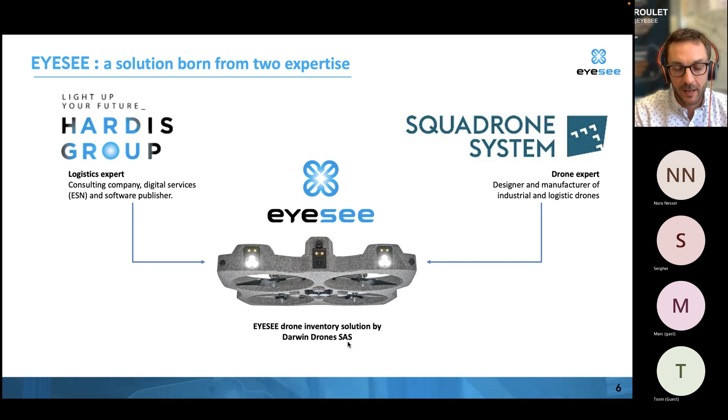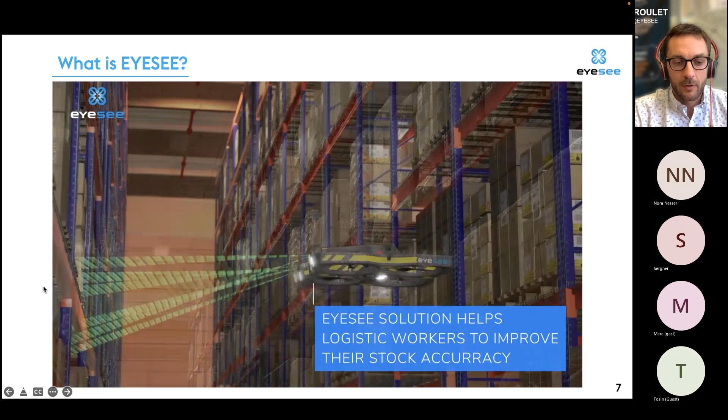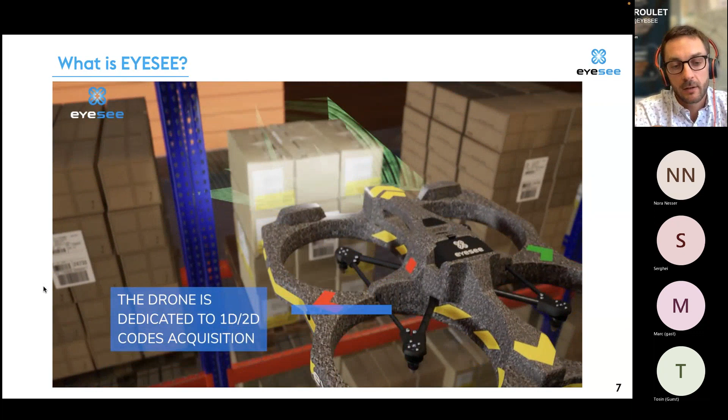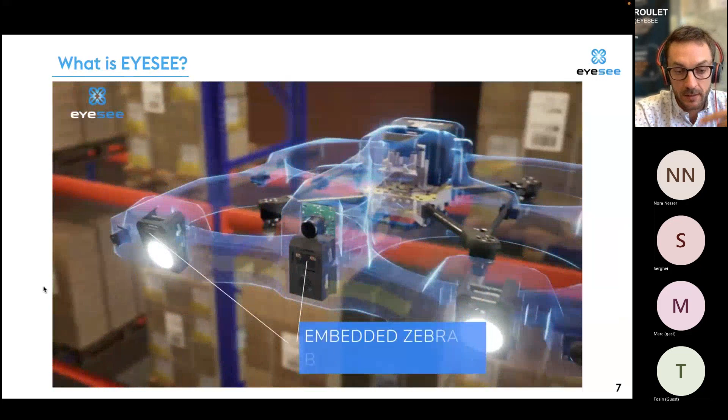So what's EYESEE? Just a very quick video - maybe you have seen that on our different media. EYESEE is really something that helps logistic workers improve their stock accuracy. It scans 1D and 2D codes, everything on full width, even in motion, and it detects empty locations automatically thanks to sensors dedicated to that at the front of the drone. So we have 3 Zebra barcode readers, because it reads very well - this is really efficient.

We have an HD camera and also ultrasonic sensors. Every data from every sensor is sent to our autopilot. This is our own autopilot.

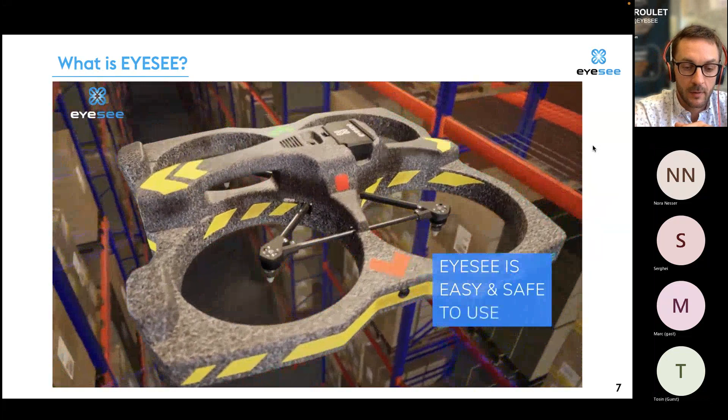We master the hardware and the software, along with our partners, and that's why it flies autonomously. There are a lot of sensors, a lot of technology on this. This is not the subject today, but if you have any questions, feel free to ask.

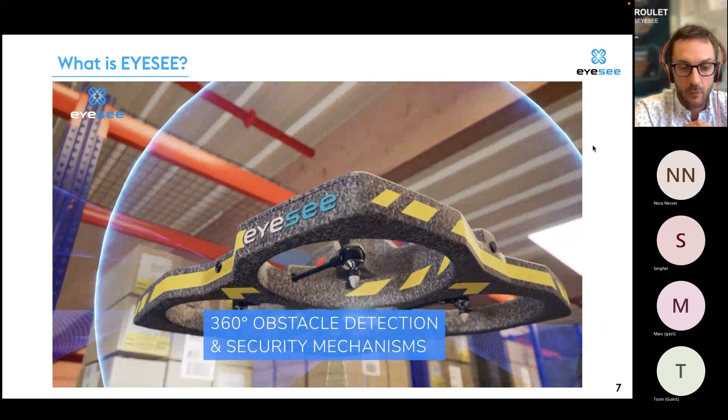This is easy to use, and this is compatible with all WMS and ERP with import and export features, from EYESEE Cloud, and we are working on an API in order to simplify this.

Of course, it detects obstacles, and this is really safe. If there is any wrong behavior of the drone or anything that is not well before starting a mission, the drone won't allow takeoff.

So this is something very robust, and we have worked and are working very hard to help you use it as easily as possible.

We take pictures of each location. We can take one or several.

Everything is customizable, even the code you want to scan. You can look only for one code of 9 digits starting with 52 - we will scan only this - or you can be more open.

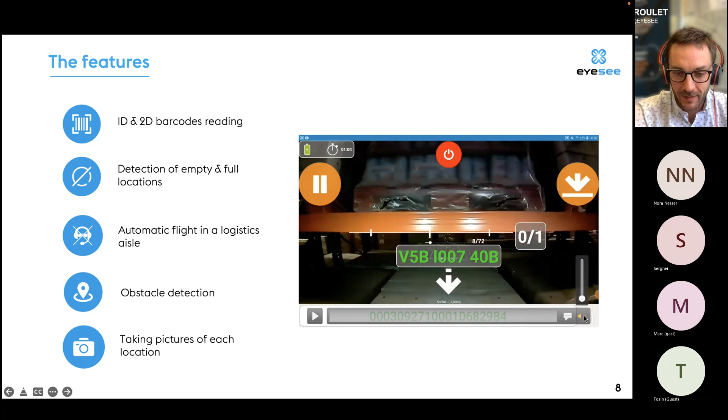As you can see, you see live what the drone sees, and it scans in motion.

How does it work? This is not 3D anymore, this is a real video, with Regis from our team. Hello, Regis. So how does it work?

Everything is in the box, in the case. You have the drone, all accessories, etc. It's really easy to transport.

You have 2 EYESEE tags, and I will pause on this because it is important. We have 2 EYESEE tags mandatory to use the drone. You have to put one tag at the beginning of the aisle and one other at the end of the aisle.

And there is also a Wi-Fi router here, and so we are not connected to your Wi-Fi - we are just using our local network. This router will be connected to the Android tablet, to the Android app, and to the drone. This is really a closed network.

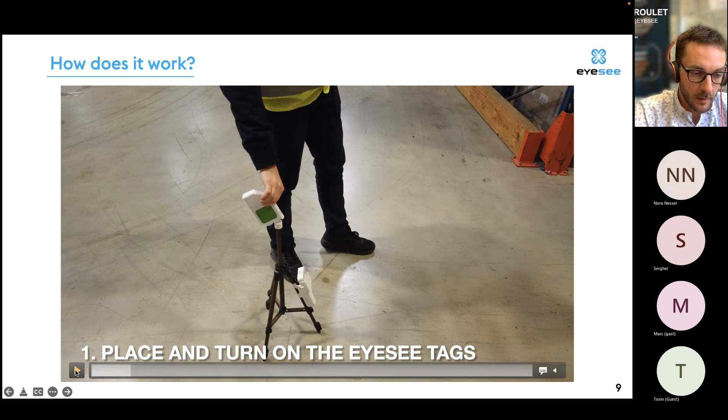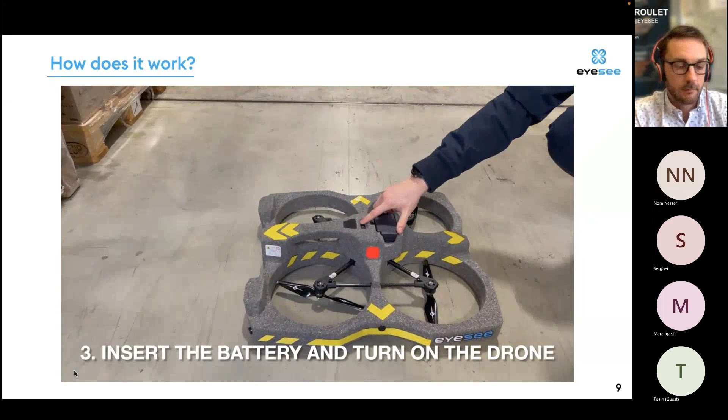Then you put the second one, you install the drone in front of the first location of the mission. So it can be, most of the time, at the beginning on the ground at left.

And then you insert the battery, power on the drone, and select a mission relative to where you are located. You can visualize the mission before doing it.

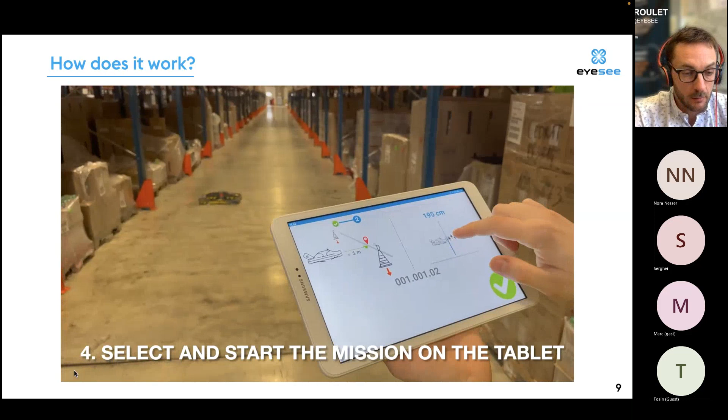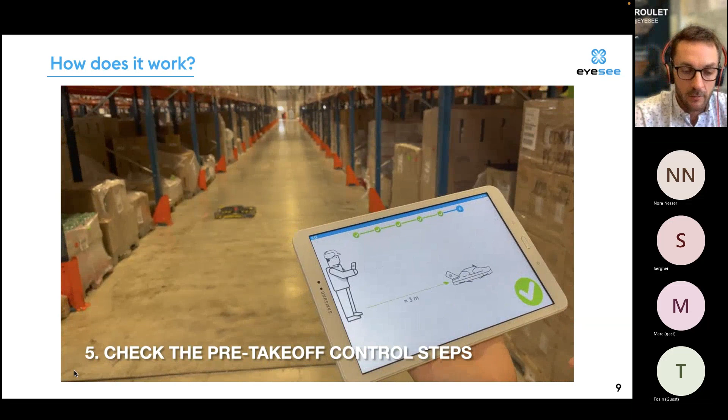You can, for example, cancel level 0 because everything is in picking, so you don't want to check that, or you can cancel the last level. You can do a lot of things in the warehouse, and of course you have prepared that, or your manager has prepared that, on EYESEE Cloud previously.

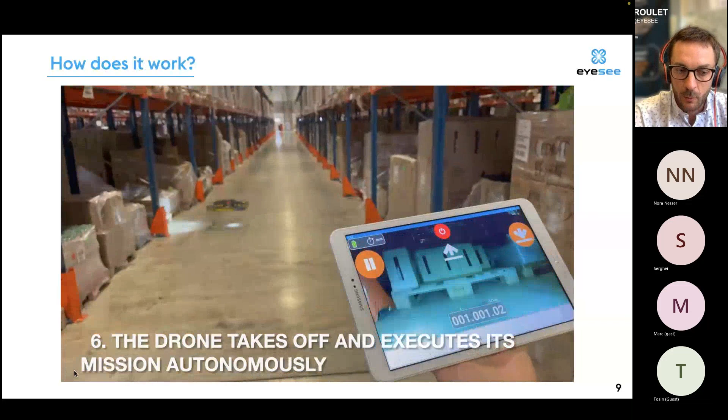Here you can see you just have to press a button in order to launch a mission, and that's it - the drone will take off and start its mission.

You can fly for 2 hours with the included set of batteries we supply with the drone, and this avoids you having to use any scissor lift in order to do your inventory check.

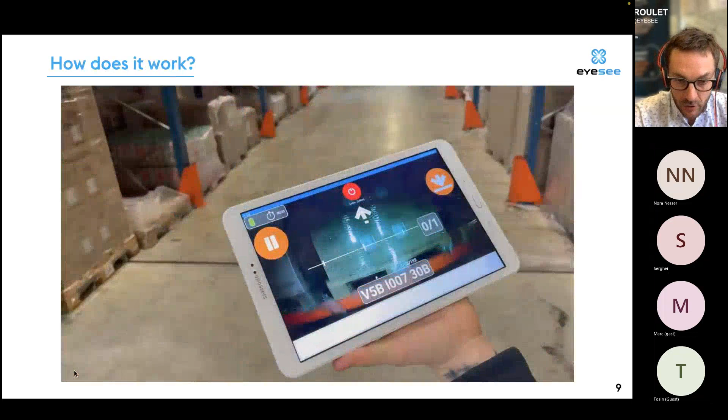As you can see here, we don't scan all codes - we scan only the code we are looking for. You can see where you are on the tablet.

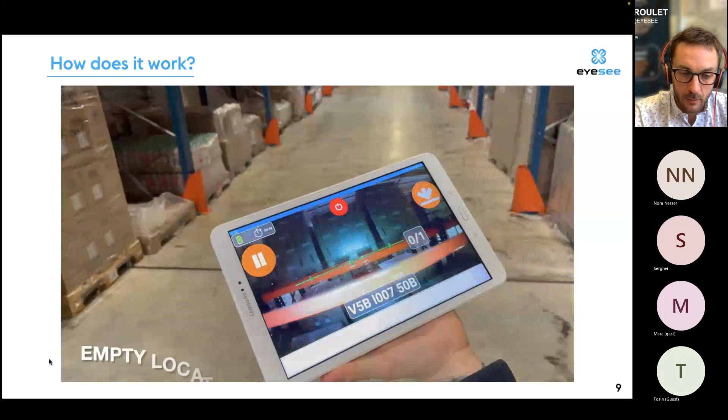Here you can see that we are going to detect an empty location. The drone - it's really easy how it works - it detects automatically if there is something in front of it.

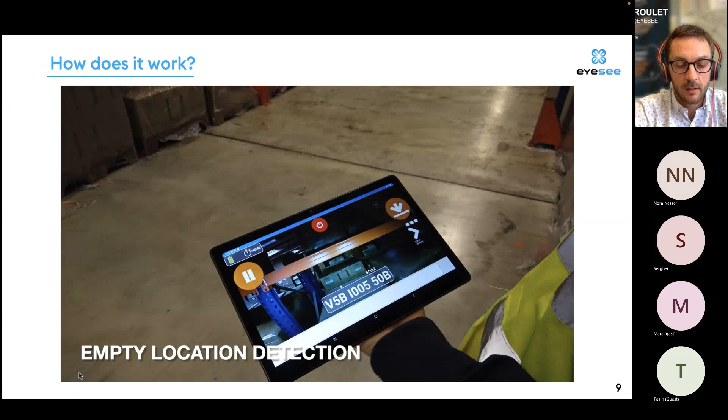So if the location is empty, the drone won't look for any code. But if the drone does detect something, it's going to look for the code you are looking for, or the category of code you are looking for.

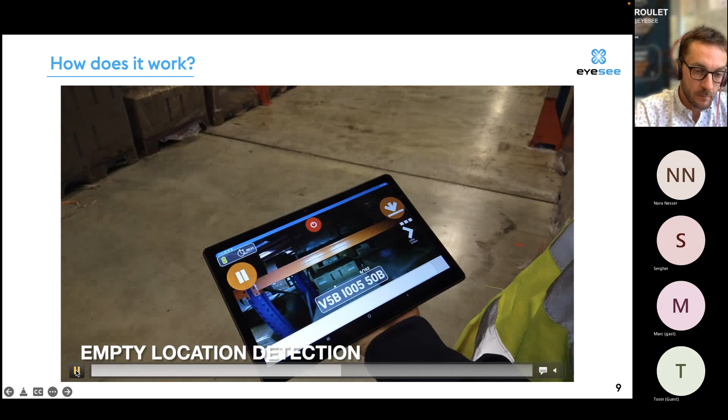There are also additional features. For example, if I pause, the drone will stop, and you have a little menu. You can declare a specific point of interest, such as identifying a problem on your rack, or another problem of category 1, category 2, or anything. At the end of the mission, you will have a resume of at which location what has been declared, so you have a view of the stock and a view of the points of interest.

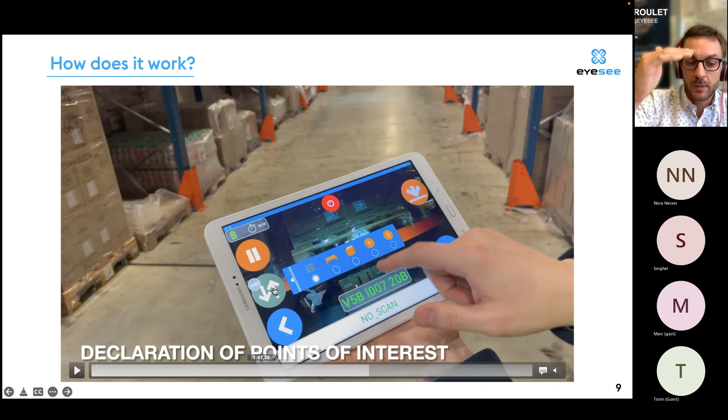Here, as you can check, is another button. This is a redo button. So when we cannot scan something at the location, or there is a missing code, you can just touch this button and the drone will repeat its movement. It can also be done in auto mode, so you don't have to push the button. If there is a no-scan, the drone will start another time, and it will reduce the speed in order to have the best chance to scan.

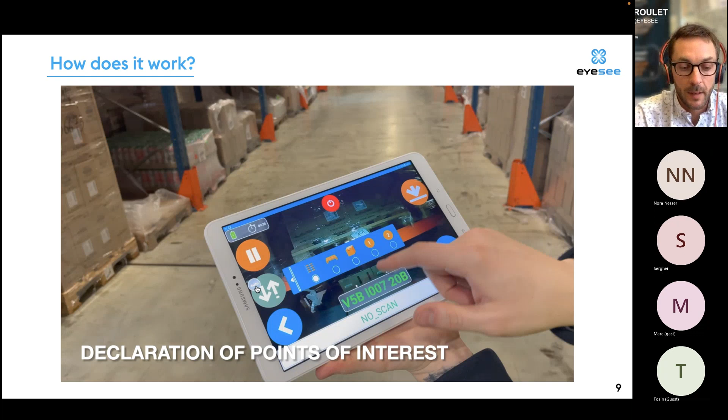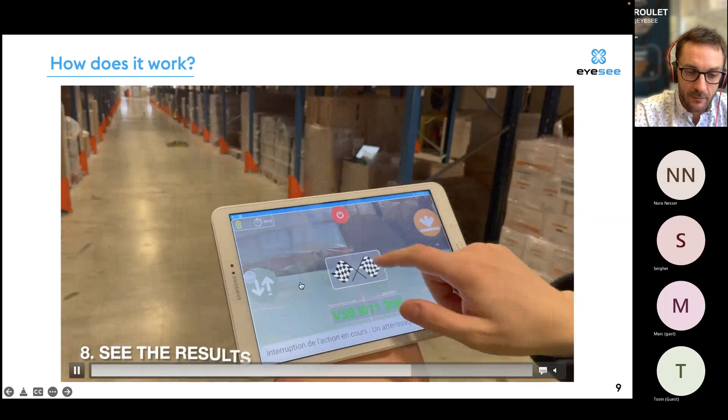So we can continue the mission. At the end of the mission, or when the drone is out of battery, it will land automatically and display the information on the tablet. Here, for example, you are going to see the result live in the warehouse, so you can act directly. This is an inventory that has been performed in expected mode.

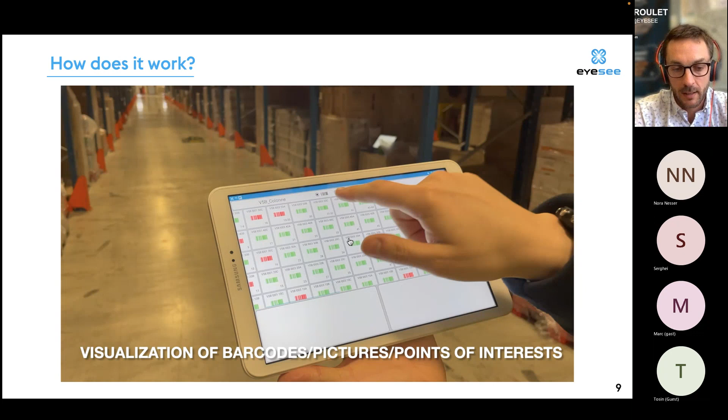So we have injected the expected data from the WMS into the tablet, and we are just checking if there is a difference between the expected data and the reality. That's why you have red and green. So this is the view of a barcode, this is the view of the stock, and then you are going to see the view of the point of interest.

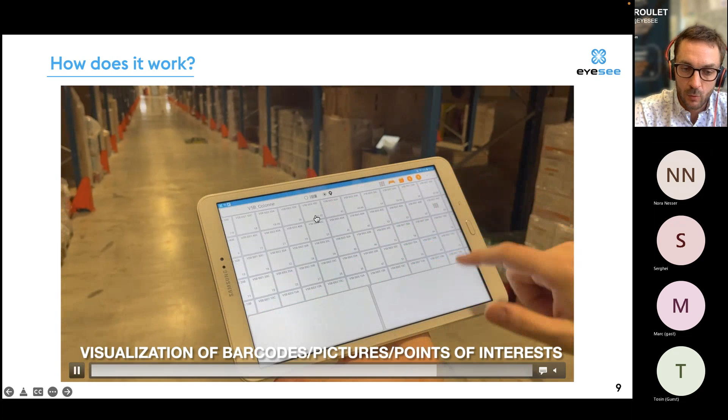The manual declaration during the flight - so here, racking, etc. Here you can have a qualitative explanation of everything. You can have a picture here. This pallet is here, I understand, etc. So this is really something important, to have reliable inventory data.

You can do that in expected or blind inventory.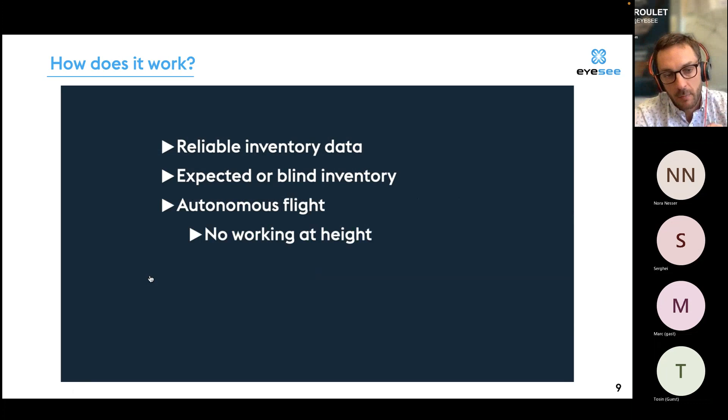This is autonomous flight. You don't have to work at height anymore, and you have dedicated safety features. Of course, you don't need to be a telepilot because it is indoor, and the regulation, the European regulation standard, does not apply indoors. Of course, we are really vigilant on this, and we are compliant with all industrial standards that we have identified - we had to, for magnetic, electromagnetic, for everything - and that's why we are a CE marked product now.

The drone will know at any time its distance from the ground, thanks to LiDAR integrated in the drone. I have lost my mouse, but it's okay. So you will know at any time the distance from the ground, and of course the position from left to right, thanks to the tags, and thanks to the ultrasonic sensors at the front of the drone. The drone is very well positioned, especially the yaw of the drone, thanks to the ultrasonic.

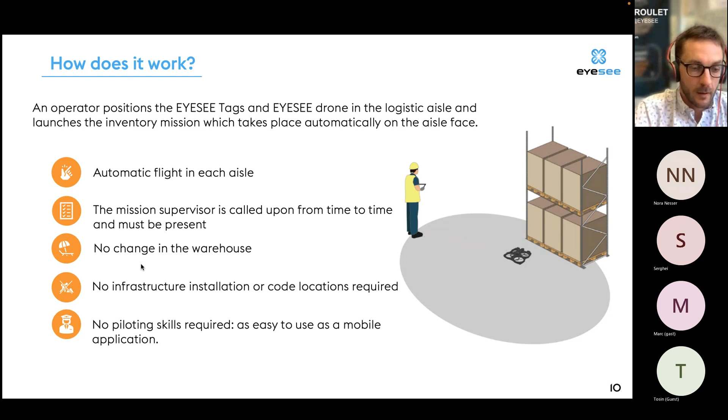Mode of use: you can do blind inventory, so without target quantity or without any code injected in the mission. You can do expected - verification of difference between the theoretical inventory and the scan locations. Here you can see the automatic flight plan generator.

As our software knows the cartography of each aisle, then we know we are in this face, VSS-002. This is the acquisition group that we select - we want to take one picture, we want to have a point of interest, we want to scan one SSCC and a second SSCC and take two other pictures. We can have different acquisition groups depending on the aisle we are in, or maybe on the process you want to apply on your warehouse at this stage. You can really play with a lot of parameters, and then it will generate an automatic flight plan, and the drone will follow this.

I said just before that you can exclude a full level. For example, here we can exclude the top level and exclude level 0. But if we want, then we can re-include it if, for example, we use it because we are really full in our warehouse at this time. You can control, for example, also one location - if you just want to control one blocked pallet or anything, you can use it as a scissor lift instead of using your scissor lift.

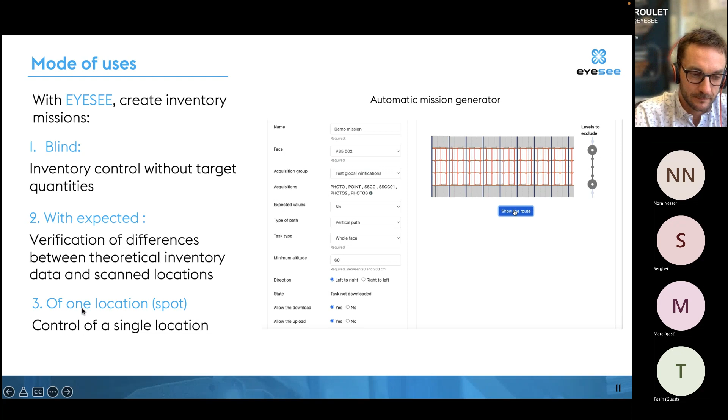So you can control and consult the result of each mission, of course, on the tablet, on EYESEE Cloud, and of course import it in your WMS ERP. We are using CSV export at the moment and working on the API integrations.

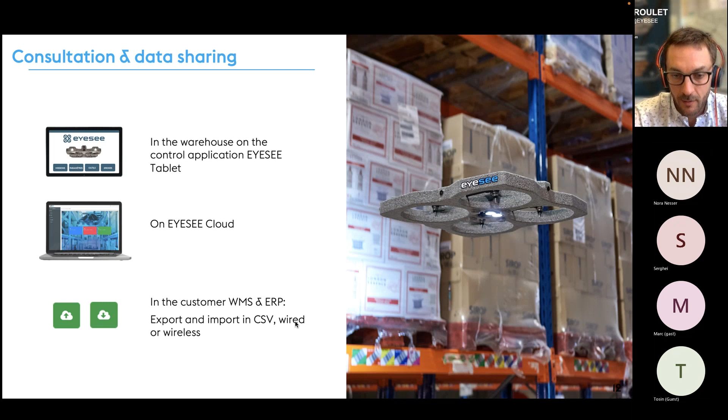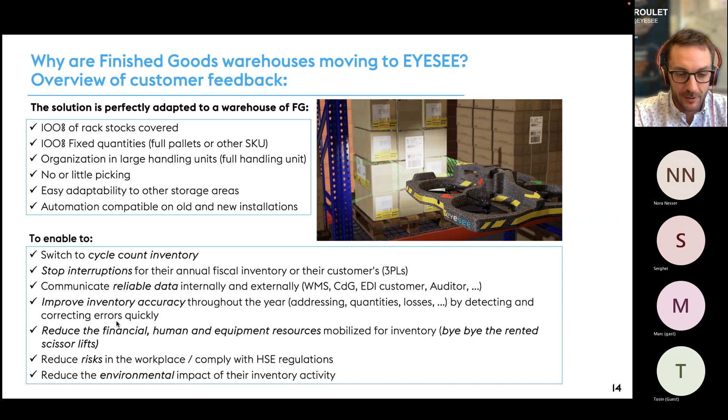So this is why our customers love EYESEE, and I will try to accelerate a little bit. For example, L'Oreal cosmetic active production, they are on this use case. In the past, they were using 10 scissor lifts, and they mobilized almost all the staff from the office, the technical, the operators, everybody was on the ground in order to do the fiscal inventory. And so they had to close the logistics site for 3 days, and even the production for 3 days.

And now with EYESEE, they have moved to cycle counting. And so now they can do more than 4 controls each year of each location, okay? And they are only using the drone for less than 2 hours a week, okay? And so they have really accurate WMS data, and they have reduced the error, and they are maybe at more than 99.8 accuracy in their WMS.

So we thank them, they are our customers since a long time. On the prototype, as you can see, this is the prototype, and now they have moved to the new CE marked version. And so we thank them for trusting us and helping us improve our solution.